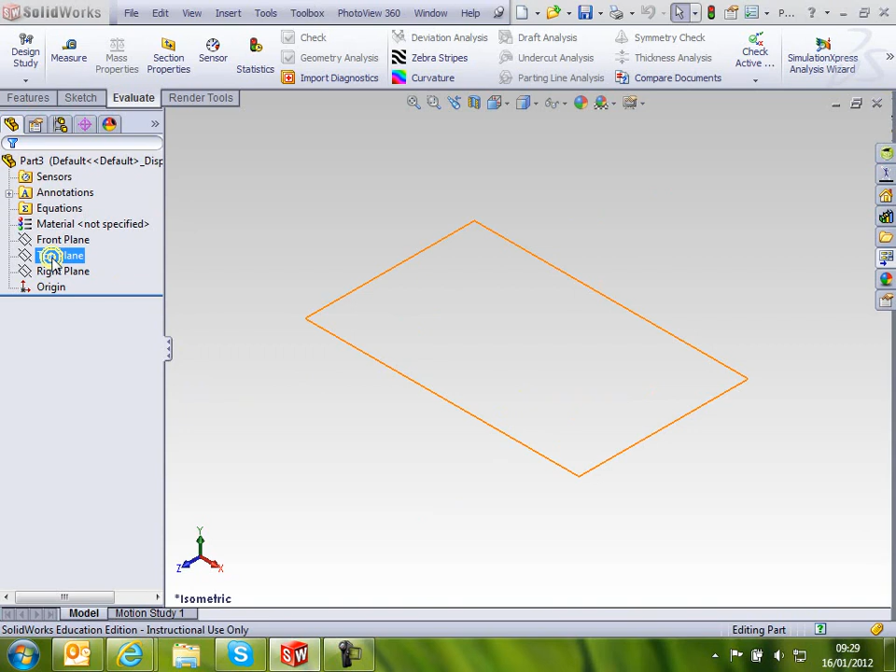Pop to my isometric, and I'm going to do my first sketch on the top plane here. So you can see my isometric. If you'd like to, throw it in isometric so you can actually see it, you don't have to draw it in the normal to sort of position. You can draw this in the isometric position. So let's have a go at that.

If I just select my line tool, and it's kind of somewhere there. The only thing about drawing at that angle is make sure you get those, you see that little vertical relation there coming on. So make sure you get them. It's easier kind of if you're in the normal to, and you can switch between it when you're doing it, so you can switch back to that if you wish.

Okay, but make sure you do that. Come along there, and this is 150, so while you're still in the middle of the command, you can scroll out to give you, so you can get to that 150 position with the wheel, so you can scroll in and scroll out. You'll get used to doing this after a little while.

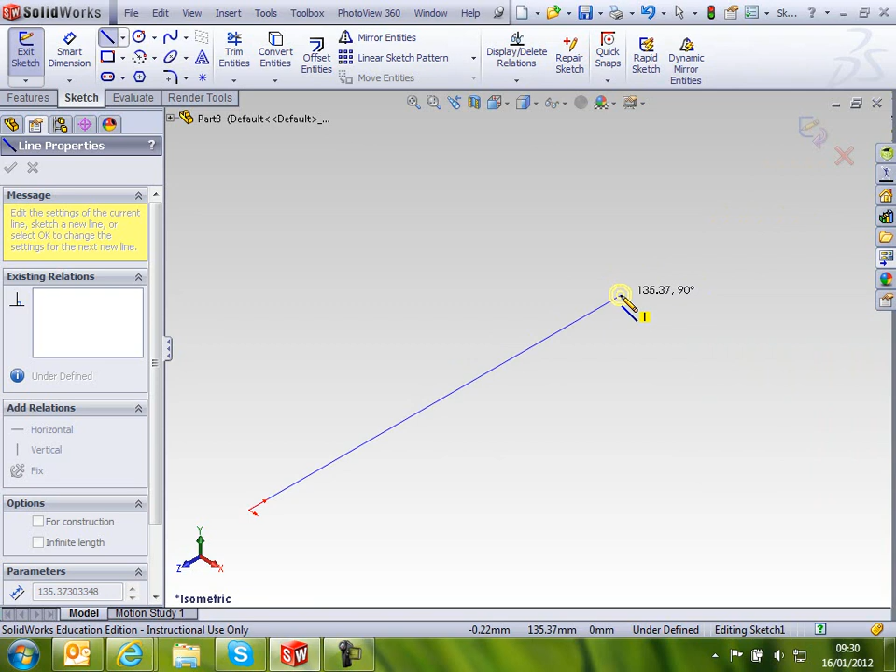So come along, making sure we're approximately 150. You see, I don't pay a huge amount of attention to it, and that. If you feel a little bit awkward doing this, then you can turn around to the normal to screen again. So you can flip between them, whatever suits you when you're doing it.

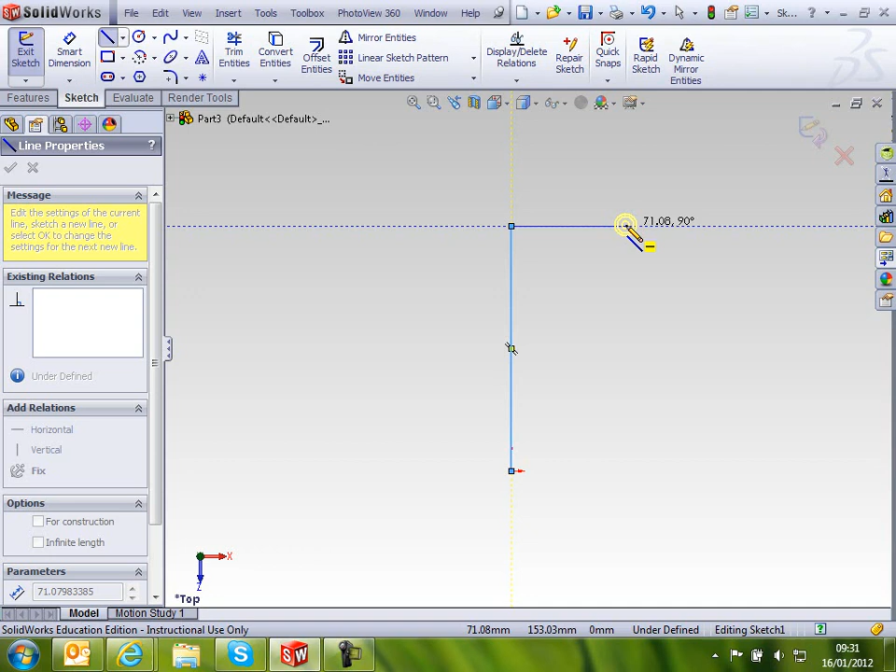So this one comes out 75. Just be careful you don't make the mistake - the 75 is to the apparent intersection of that corner point. So the fillet removes this point after, so we'll do the fillet after, but it's approximately 75.

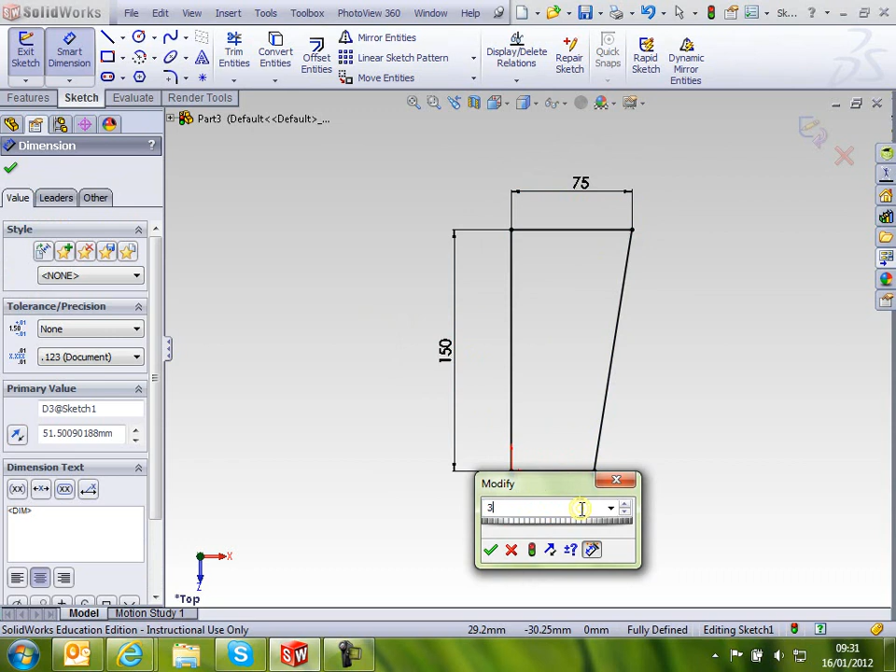And down here somewhere like that, and back to there. We can pop into dimensions now. So pop into dimensions, that one's going to be 75, this one's going to be 150, and this bottom one again to the apparent intersection is 35, isn't it? Yeah, so 35, so do my isometric view on that.

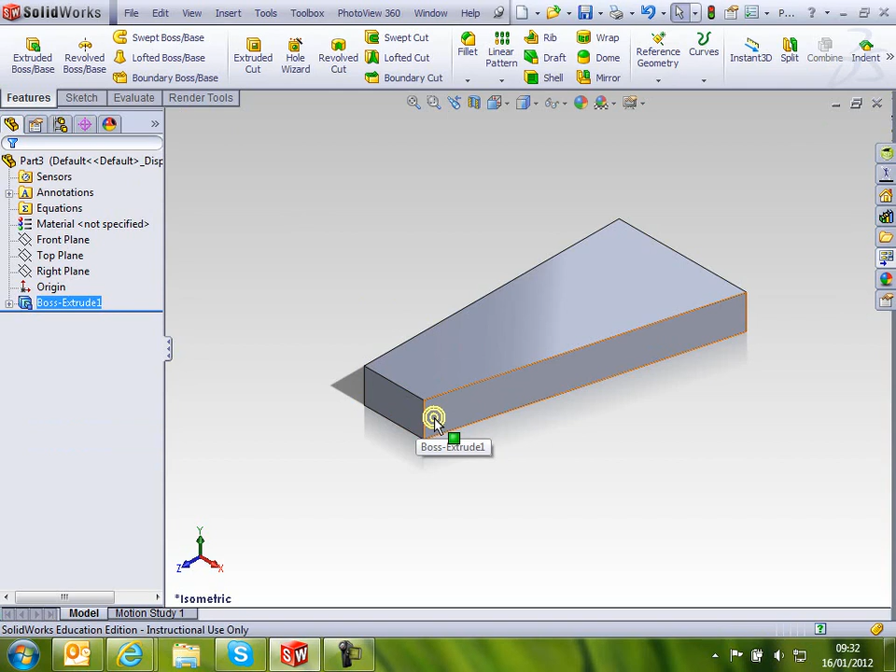And exit my sketch, and we can then extrude that whole thing. Extrude it up at a distance of 20. Okay, and we pop the fillets on later. We won't worry too much about the fillets just yet.

And then if I spin around here and I do a sketch on this surface here, and then go normal to on that, and I know I'm coming down to this one, so this is the low side to the high side, so just be aware of that.

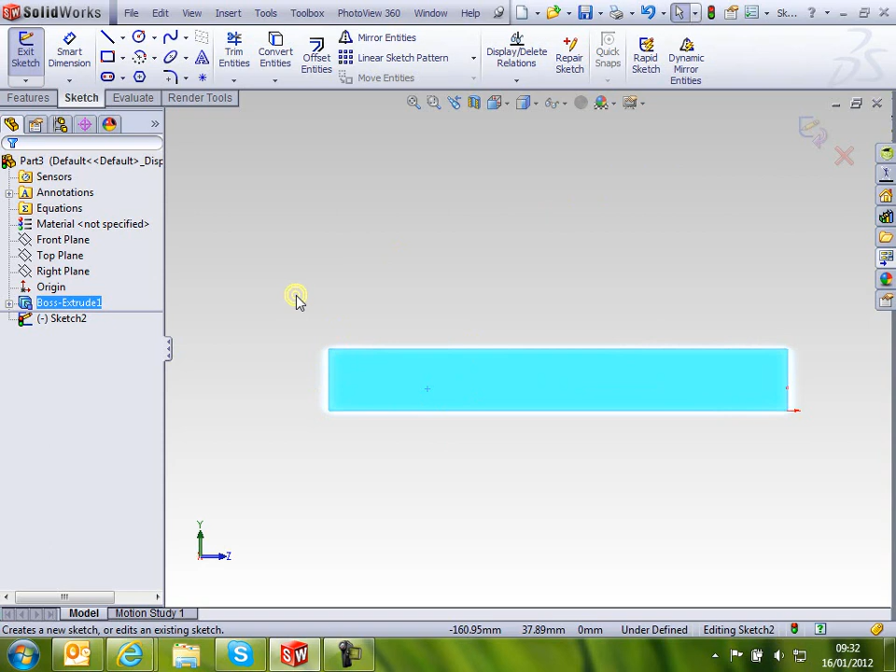And because the dimensions are taken from this bottom, so we don't make any errors, let's draw the thing from this bottom point. So making sure I latch onto that little coincident point there in the corner. So I'm straight up, and it's straight up a distance of 60, so about 60, and it goes up, and you'll see that I don't really pay too much attention. I draw roughly the shape of it.

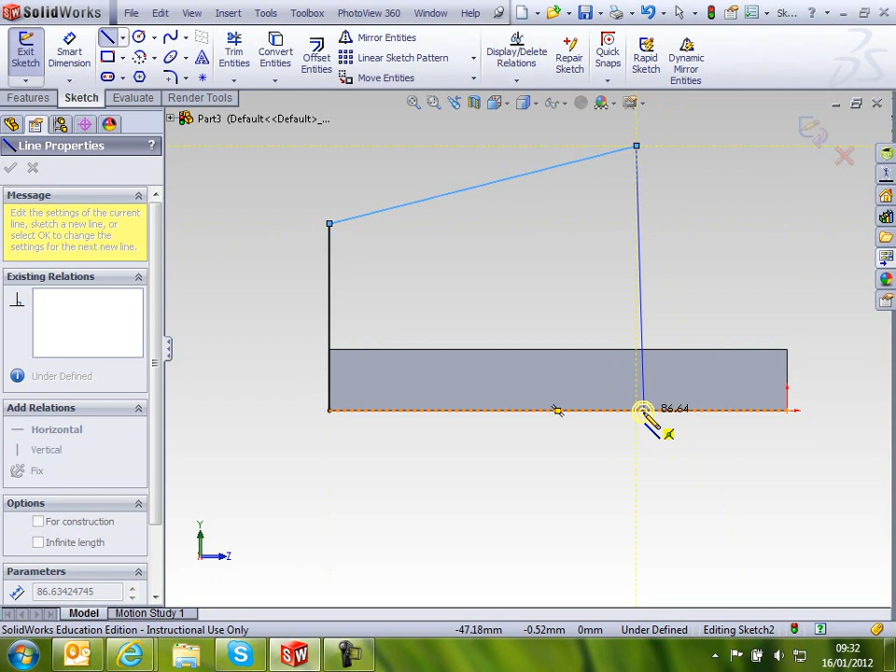Don't care if I'm a million miles away, as long as my relations are right. So you can see my vertical relation and my coincident relation coming on there. So as long as my relations are right, I don't worry too much about the dimensions. I know I'm going to pop them in just a second.

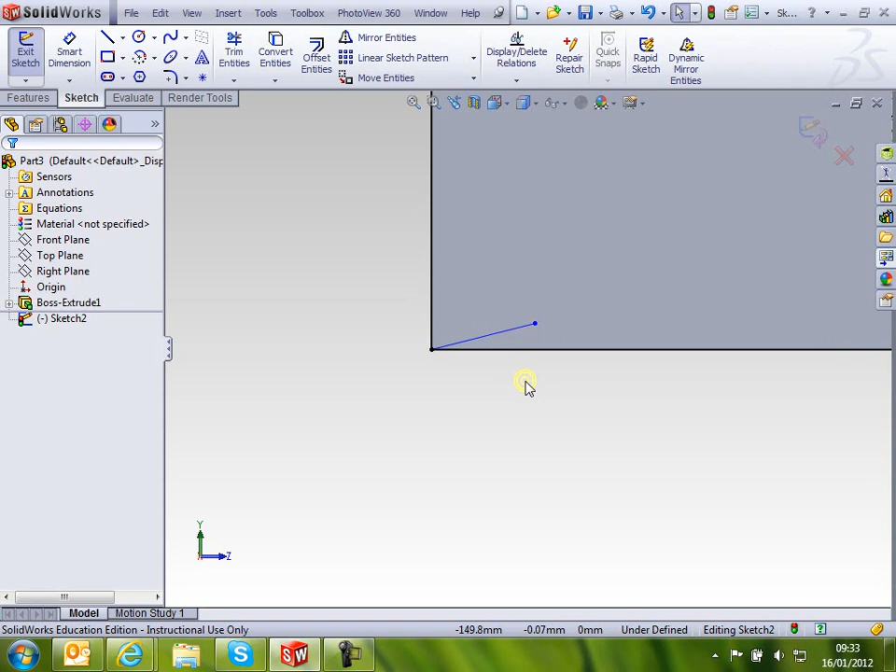Now, you see that little - and this happens to me all the time, so you'll probably find it happen to you as well - you see that little notch there? I don't know if you noticed it, but I accidentally double clicked on that, and I left that little tail. If I leave that tail, it's going to cause me errors when I try to do a little extrude. I'll leave it there temporarily just to show you the problem it may cause you.

Now, it's very hard to notice like that, but when you get used to making that mistake a few times like me, you'll get used to spotting them. So it's just when you're trying to rush and do these things, it does sometimes cause you that little bit of an error.

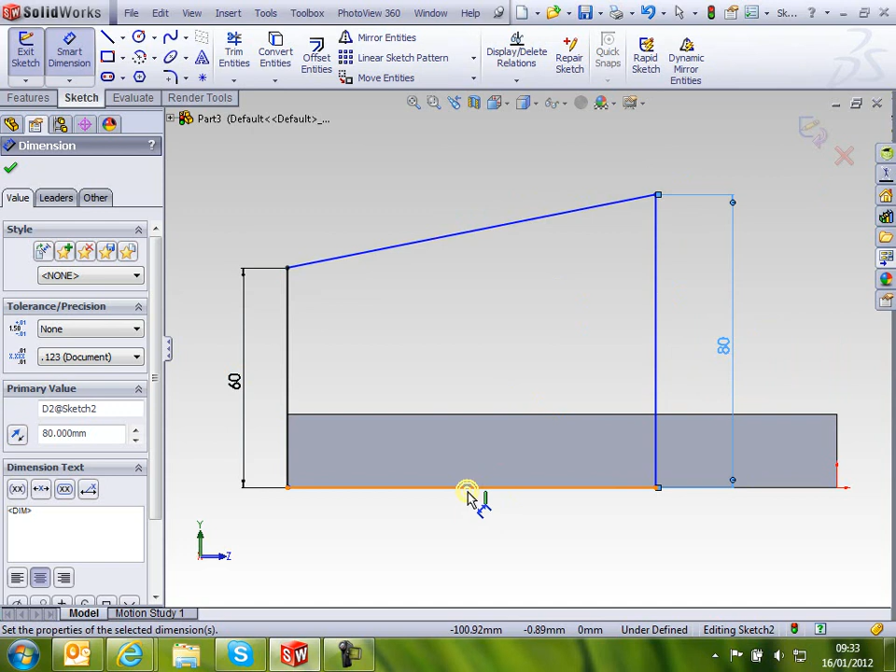So coming up right here, pop in all my dimensions, and I think I'm finished, and I'm going to exit the sketch, and let's see if it'll let me extrude that boss base.

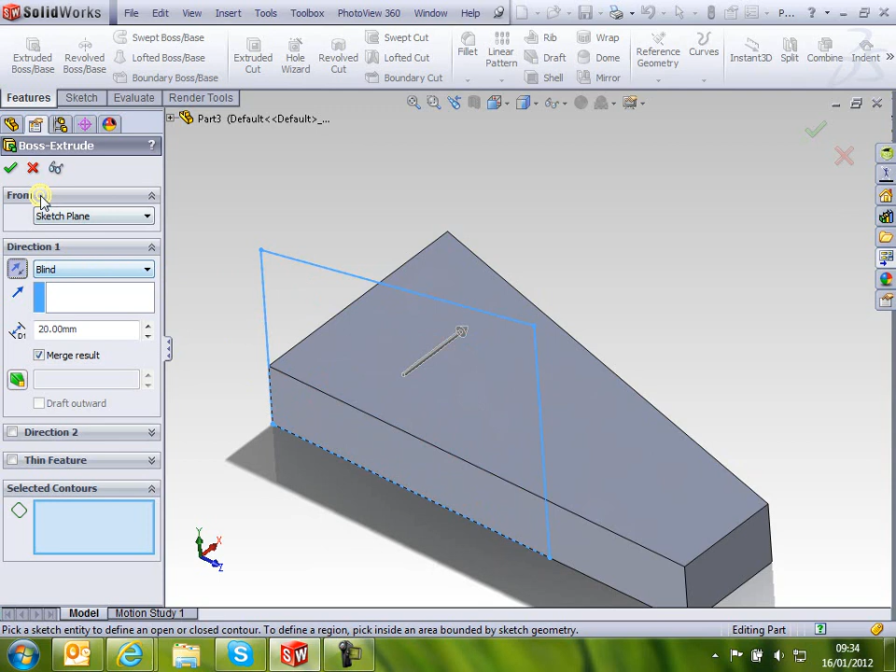Flip the direction, and look, it's looking for me to pick areas here. So if I just go OK, sketch cannot be used for a feature because an endpoint is wrongly shared by multiple entities. That's my little problem.

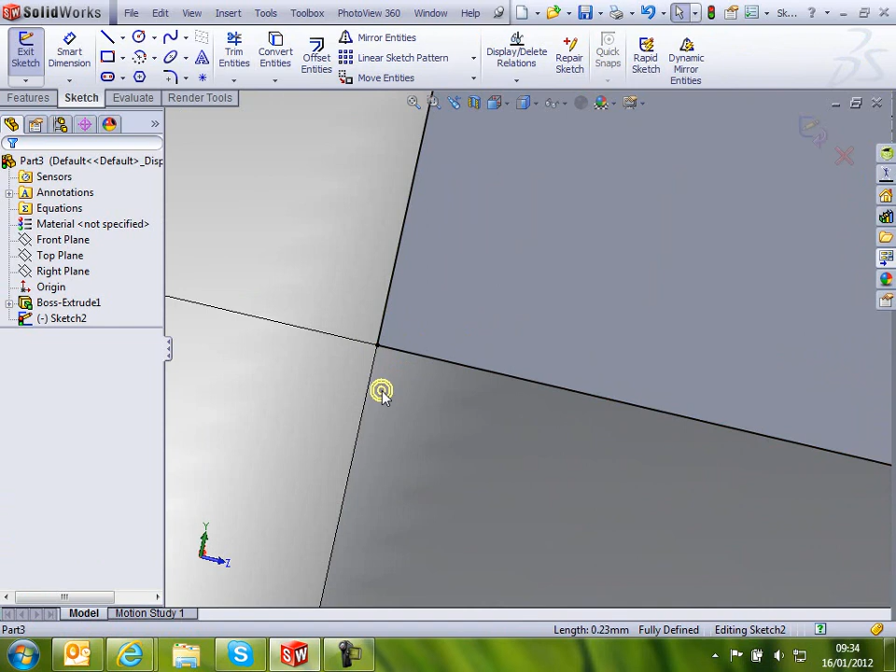I pop back in to edit this sketch, right click and edit my sketch, go in there and just delete it. It's nice that I'm making all these wonderful mistakes for you guys to see, because you're going to make these as well. It's going to happen. It happens all the time. Don't worry about it.

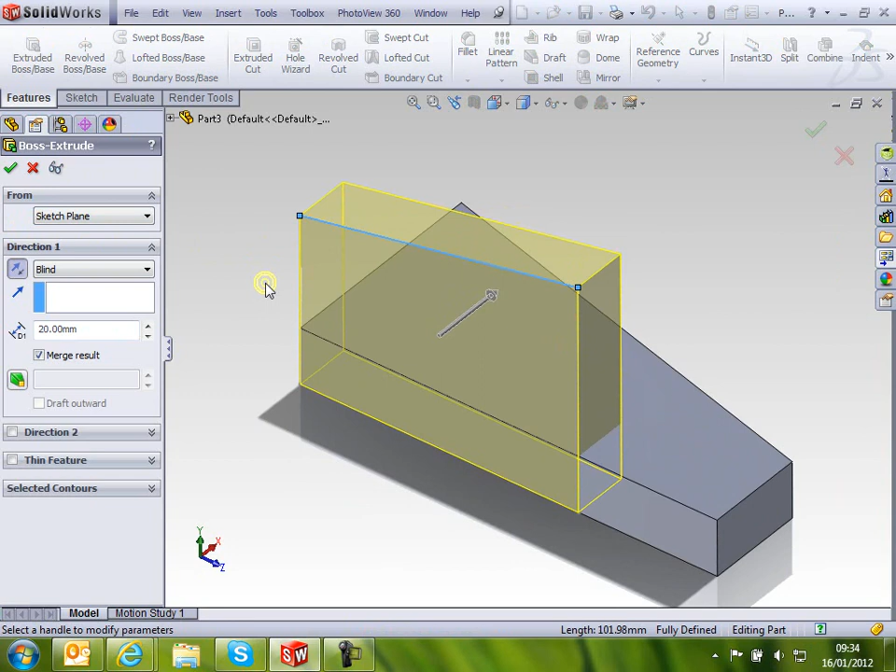So now when I exit my sketch and do my extrude boss base, I just need to click on the line, flip the direction. What thickness is this? This is 20 as well, happy days, so just click OK to that, and everything kind of works this time. Do my isometric view.

Now I can put on my fillets. I'm going to use my fillets to kind of help locate my holes, so put on the fillets next. In the feature tab you'll see my fillets over here.

Select a fillet, and there's a manual fillet and a fillet expert. I tend to use fillet expert all the time. You don't have to be an expert to use it, you'll see it's kind of easier. So I like the fillet expert for now, and then just pop in your fillets.

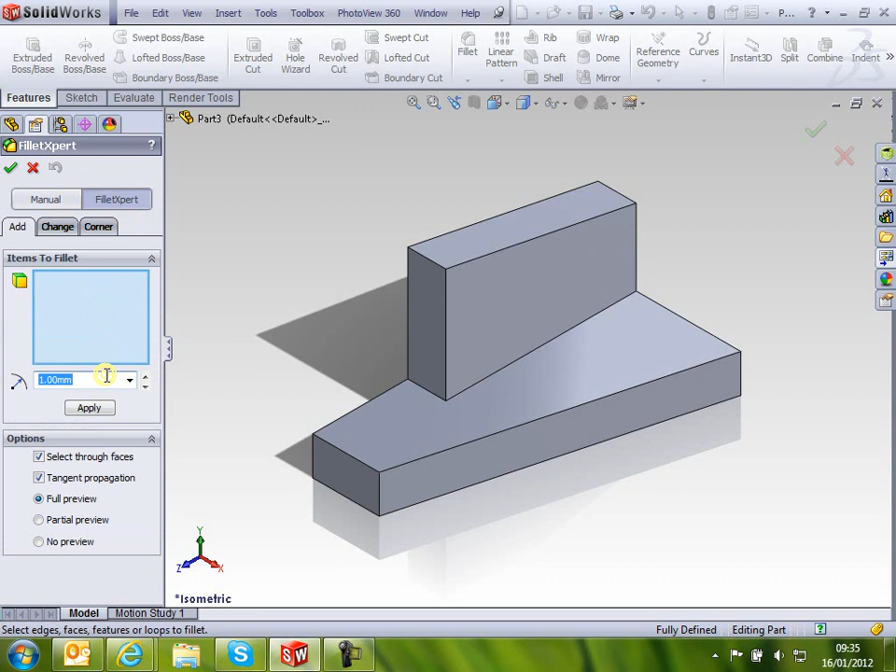We've got 25 radiuses, so we'll do that one first. 25, and I was clicking this little blue area, and that one's 25, and this corner is 25. So you don't have to pick the face, it's just pick the corner point.

Apply that. Because you're using fillet expert, it leaves you in the fillet expert, so we can actually apply the others. I can then select this other one, so we've got a 20 mil radius there. On this face here, corner here, we've got a 20 mil radius, apply that.

And then on the last one, I think we've got a 12 mil radius. So 12 mil radius on this corner. I think that's right. And then pop in my little holes, and we're going to use these circular edges to sort of add here in the corner just to help us find our positions on that.

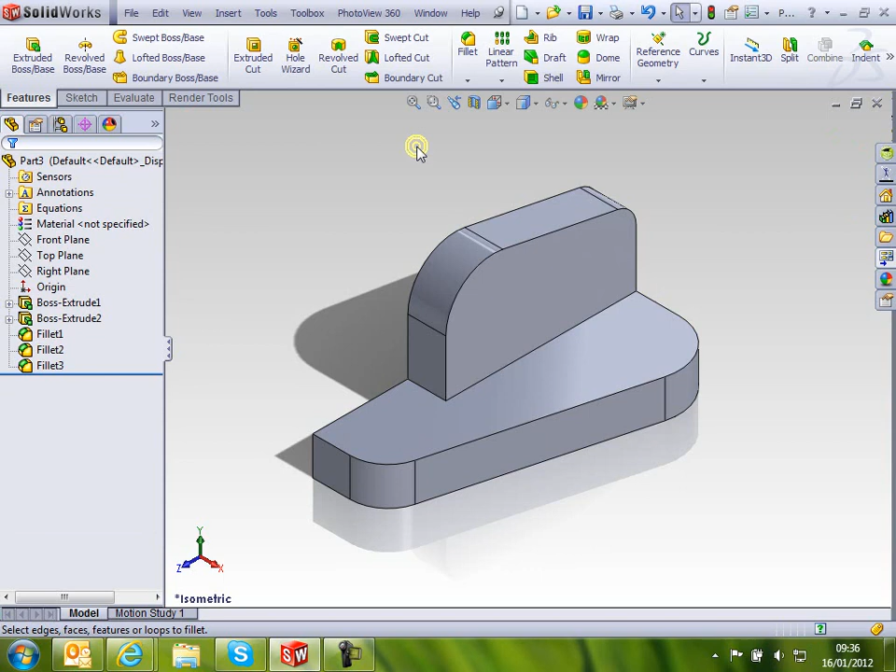So we've got 2 diameter 20 holes through all on this face, and we've got a diameter 18 hole through on this. So I can go out of that and then extrude cut, select that face.

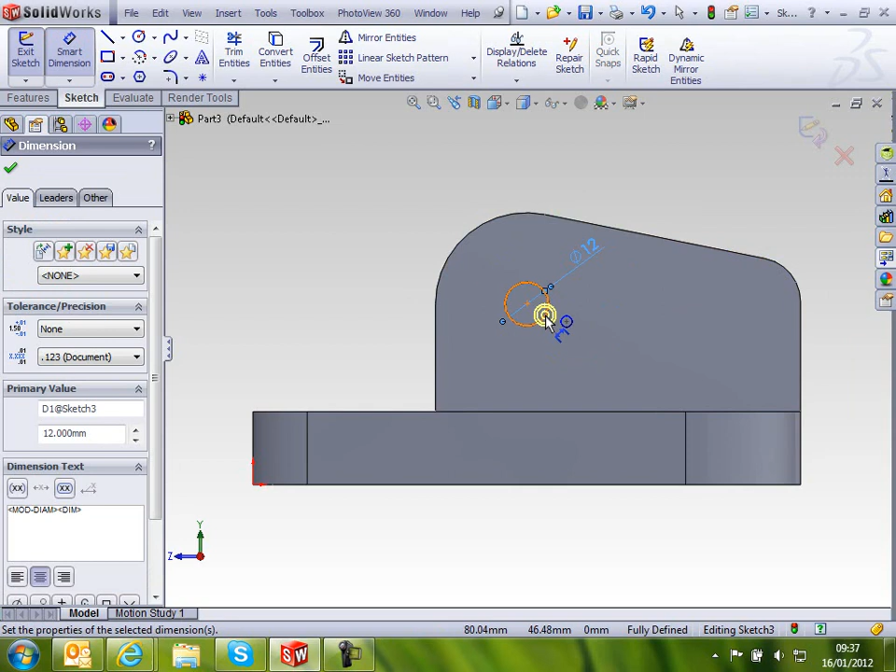And circle. If I just hover over the radius there, go normal to on that, hover over the radius, it wakes up the center point, so I can coincident that center point and then pop in my dimension, and that's 18 - sorry, 12 isn't it? That's more like it. Exit my sketch, and I'm going to go through all on that, and OK.

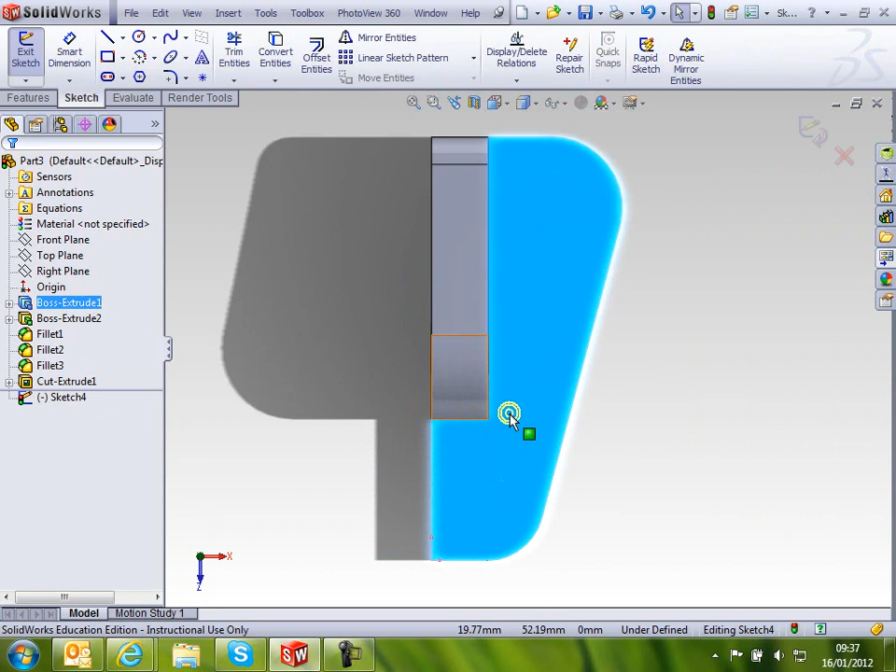Same down here, so extrude cut, go normal to, and do my 2 circles here. Again, wake up that center point just by hovering over it. You just wake it up, and you get that center point. And that's going to be 20, isn't it? Yeah.

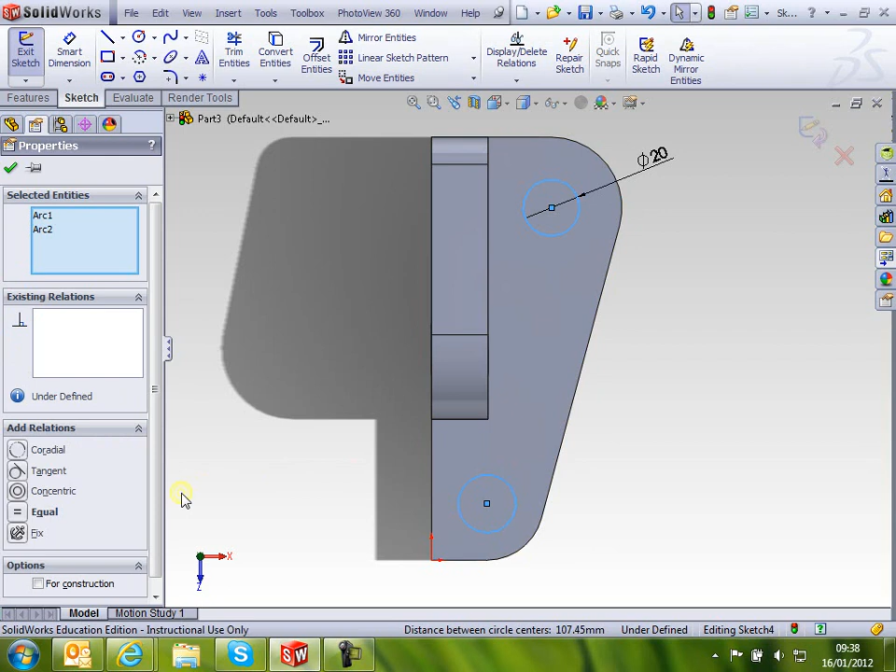Just a little bit of design intent - let's say you always wanted that hole to be the same size as that. I just hold my control key down and select that circle and that circle. My little relations here, you can see them equal. So select the little equal relation and click OK. And now you see it's fully defined.

Now I can exit my sketch and again select through all, because I want this always to be through all. Okay, so that's that one.

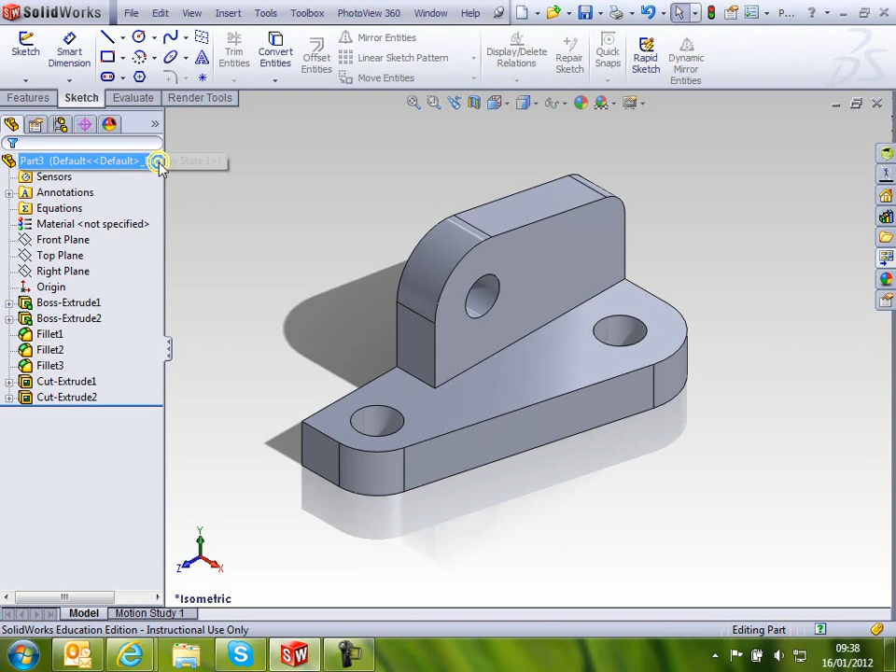And then last but not least, if I hit my keyboard shortcut just to get my mass properties of that, it's 237.04, and the center of mass, if you started in the same point as me, you'll get that. If not, it may be slightly out. Don't worry too much about that. As long as you get the mass at this stage, you'd be happy enough with that. Okay.